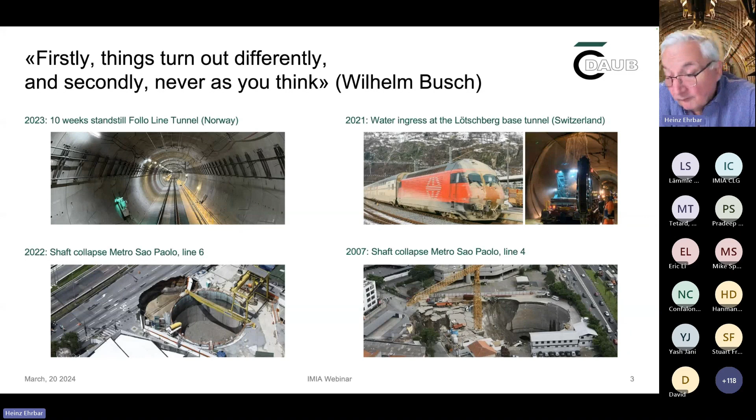So the German author Wilhelm Busch said once, firstly, things turn out differently, and secondly, never as you think. And as those pictures show from certain projects, Follo Line, Lötschberg Base Tunnel, and two pictures from the metro in Sao Paulo, this sentence is also valid for underground construction. If you take the picture of the Lötschberg Base Tunnel, nobody thought that we could have such a water inflow in a tunnel which was built with an impermeabilization, but finally we had such a water inflow, and the train was rather dirty, and for the people it was not a very good experience to drive through this waterfall. And the other things are similar, very often an influence of water. So I think that's very important.

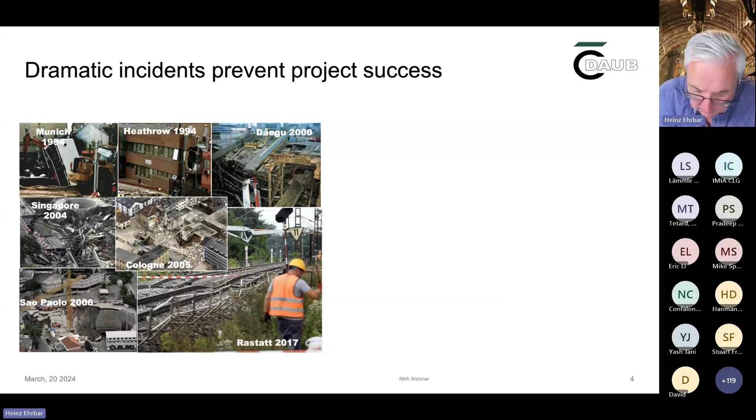As we mentioned already before, the incidents in underground construction have a rather long history. It started with the major tunnels 100 and more years ago. There were several big catastrophes also in Switzerland. But if you have a look back during the last 30 years, we have certain examples from Munich, very well known in the UK, Heathrow, but also in Asian countries, and also in Germany, Cologne and Rastatt were very big incidents. And the consequences in the most severe cases are the loss of lives, fatalities, and serious injuries. But very often we also have delays in the construction program, and this creates enormous financial losses. I think we are talking about tens of millions of euros or hundreds of millions of euros. So if you take the case of Cologne, this was nearly 19 years ago, and the line is still not constructed.

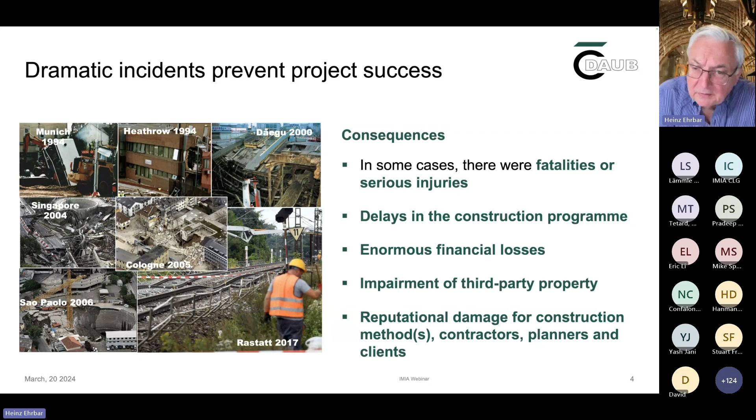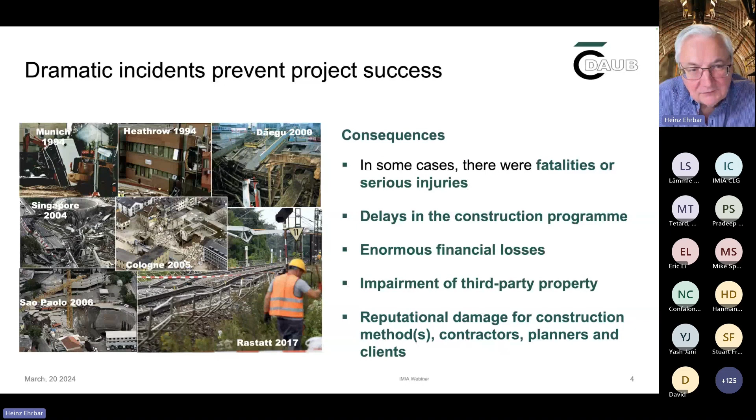Then impairment of third-party properties, and it can create reputational damage for construction methods, the contractors, the designers, and the clients. I remember very well that NATM was not a very good word during or after the Heathrow accident, or I was once in Taiwan where nobody wanted a TBM anymore because they had certain difficulties in a major road tunnel there.

Risk events do not simply occur. That's something you know, but I think one has to remember this chain of cause, risk event, and impact. So risks normally have a cause and the risk event, which has a certain uncertainty. But if we have an event, then it has an impact and it has consequences on the project objectives.

And risk management is nothing else than to help to avoid the threats and to use or utilize the opportunities. And this starts with recognizing the causes and eliminating them as soon as possible, and then to minimize the probability of occurrence in the case of a threat, and to minimize and to control the impact of a threat.

On the other hand, opportunities, we want to make use of them, and we want to promote the causes to maximize the probability and also to optimize the impact or to maximize it. These are some key issues.

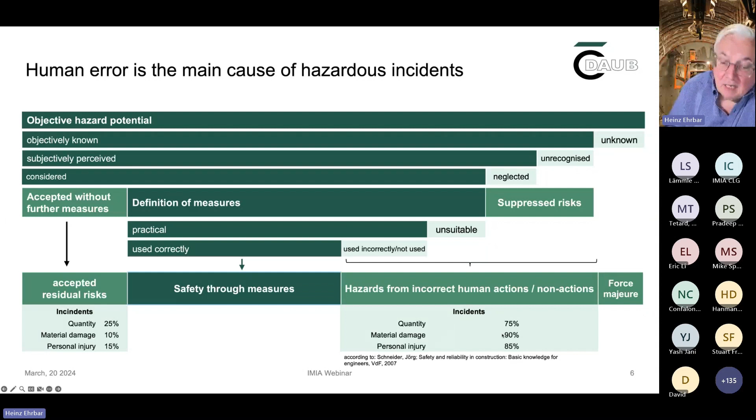But if you have a look at the material damage or the personal damages, injuries, then we see that these figures are even higher. And I was very happy to see that the figures correspond very well also to your studies. A little more than 10 years ago, Mr. Reiner published these figures, and we see that force majeure is in a similar range of 18%, and the rest, lack of communication, insufficient ground investigation, defective construction, design errors, is related to human behavior.

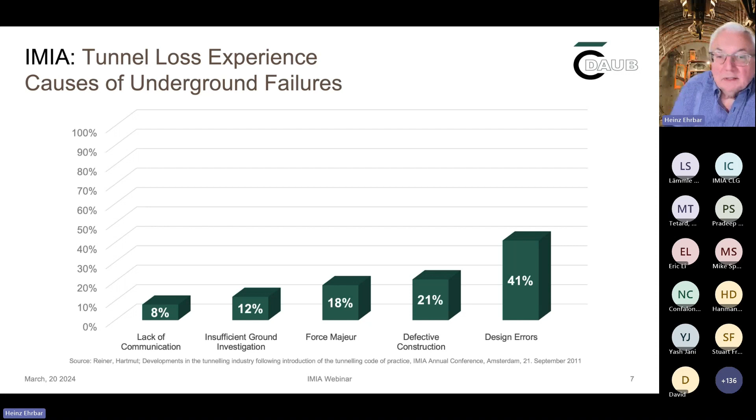And I insist a little bit on this because in underground construction, we always see the ground risks. They are very important, but it's also very important that we are aware of these mechanisms of human errors and that we fight the human errors together. This is, I think, very important.

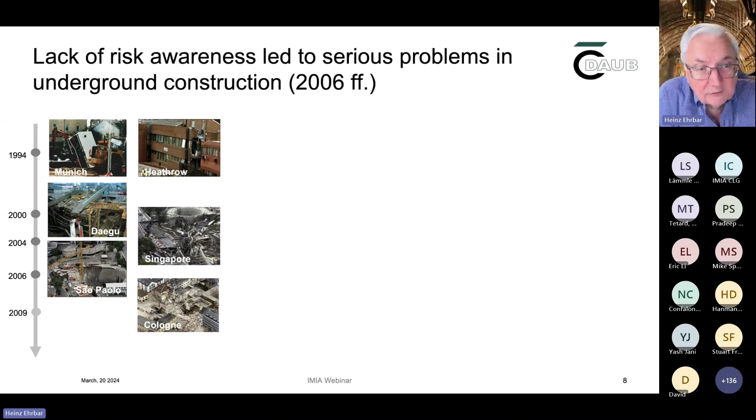As we were talking before with Mike, this is a long history, the cases you have seen already. But in 2006, the situation was like this, that I think the insurers said we are not able to insure underground construction anymore if there are not certain measures taken. And this was then the moment where one started with this code of practice, first from the British Tunnelling Society, then with IMIA and ITA. I think in 2006 it was only the insurers, and then 2012 with ITA.

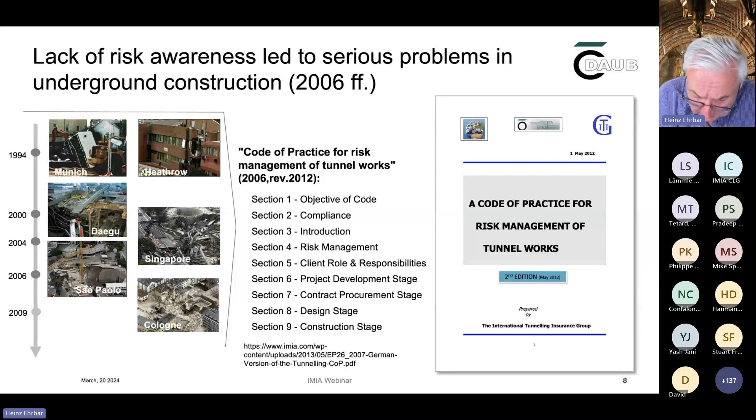And according to my experience, this is an excellent basic document. And as I mentioned to Mike, I was in the Swiss Tunnelling Society in the executive board, and we had members there which said, if we have to follow this paper, we can't construct tunnels anymore. They didn't understand the importance of the message in this code of practice. And I think if you only follow this code of practice, you can avoid a lot of problems. So I think there was a very important input.

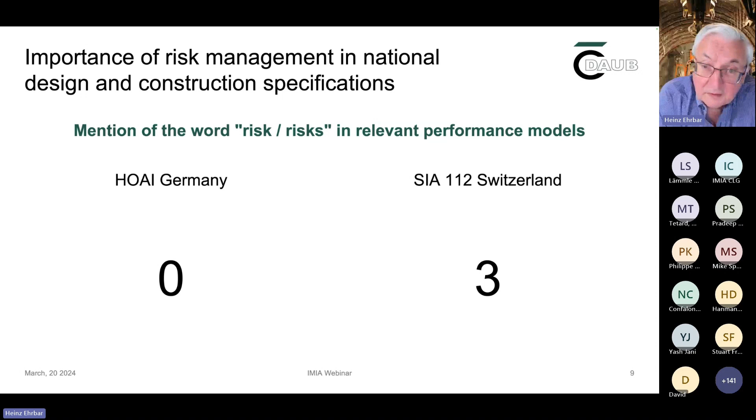But if you have a look on the national specifications on design and construction of engineering or architectural works, we have in Germany this famous HOAI. This is a specification for the services of engineers and architects, or in Switzerland we have the code SIA 112. And if you take a PDF document and you start searching for risk or risks, in Germany you have 0, and in Switzerland you find the word risk 3 times. And I think this is completely insufficient. And this was the motivation for us in the DAUB, that we said we have to start once more with this topic and to promote it, that a very important task of engineering work is risk management.

What is very important also is the hierarchy of the risk management, because after the bankruptcy of major organizations, Enron, I remember, or Parmalat in Italy, in many countries there were introduced legal requirements on the level of the company risk management, and these requirements from the legal part, they must be fulfilled. On the level below, on the risk management in the project, we don't have these legal requirements. One can say, okay, to fulfill the company level, we have to do something on this level, but there is a lack of pressure, sometimes also of documents, how to do this on the operational level.

And finally, if we are going to the construction phase, I think there we have a lot of excellent documents on the processes, how to construct. I think there we have a good basic work, but here we thought we have a lack, we don't have sufficient ground, and we have to do something from the DAUB. And therefore we said we will produce something for the German-speaking market, not because the ITA paper is not good, but it was not very well known in the German-speaking countries. And we said we want to do something which can be included also in our contracts, or that we work like this. And we got also big support, I have to say, from the insurers, especially also from Munich Re, which helped us and supported us very much in this work.

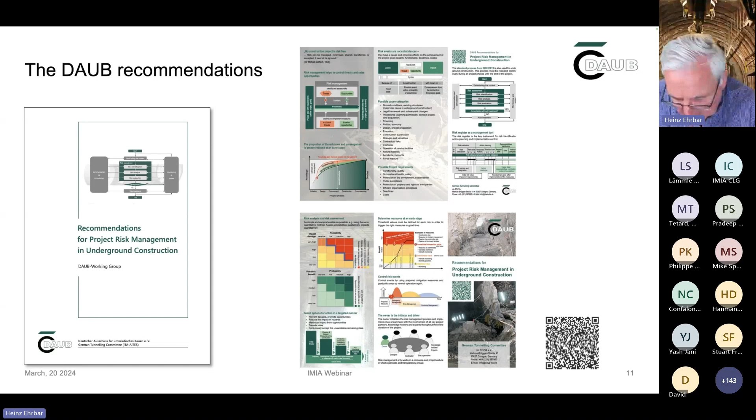When we presented this work at ITA, the people said 70 pages, it's too long, can't you make a shorter version? And we produced this flyer, which you can also download, with the most important topics. And I think if you only follow this flyer in the projects, you have already done quite a good job. And this was our motivation.

So the objectives and the target audience: the recommendations are intended for everyone involved in the project, not only owners, but owners, designers, contractors, third parties, also experts, whoever, and for all phases in the process of a project development. And what we wanted to show is the imperative need for the phase-specific project risk management. I think during the entire cycle of a project, we have to implement the risk management. Then we wanted also to clarify the role, specific duties and responsibilities of the owner, designer, contractor, and introduce common and easy-to-use methods and tools for the project risk management. Because the focus must be on our site, and it shouldn't be too complicated for the management of the site.

So the scope of the recommendations: it is principally usable or applicable for all construction works, not only underground construction, during all project phases, from the basic design until commissioning, and for all trades of civil works. If you go to the industrial processes, mechanical or electronics, there it might be different, but for civil work it works. And it should also work for all contract models in construction. In general, maybe one has to change a few things, but it is generally applicable for all contract models.

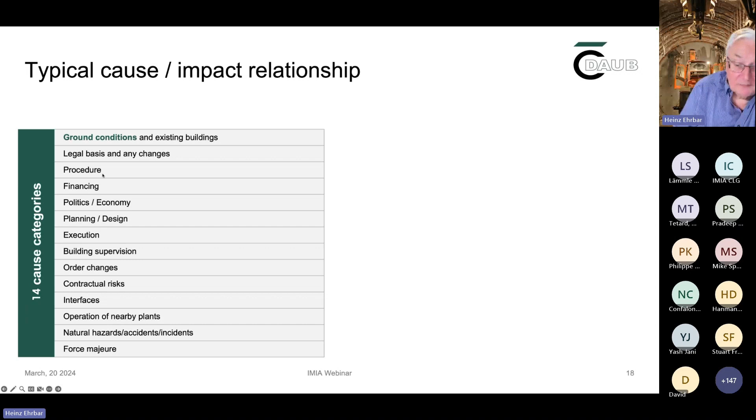Very often one is discussing the causes, and you can find in the literature quite a lot of catalogs of cause categories. We made a compromise of this literature and defined, also based on the German experience, these 14 cause categories. And as you see, we have the ground conditions here, and we have force majeure and natural hazards, but the rest is all related more or less to the behavior of the project team. And this can have an influence on the project requirements also.

Very often one is talking about only cost, time and quality, and we created a catalog of 11 important project requirements for underground infrastructure projects.

Then the process starts with the risk identification, and this is very well known. We have a lot of different tools, from workshops up to interviews, literature study. What is my personal experience, and I'm a little bit frustrated about this, at least in the German-speaking countries: at the Gotthard base tunnel, we had risk registers in the most complicated cases with about 400 risks in the risk register. And when the tunnel was completed, this went to some archives, and nobody was interested in these risk registers where you have a tremendous knowledge base. And I think one should evaluate existing risk registers, or have a place where I can find such registers, and then everything becomes a little bit easier.

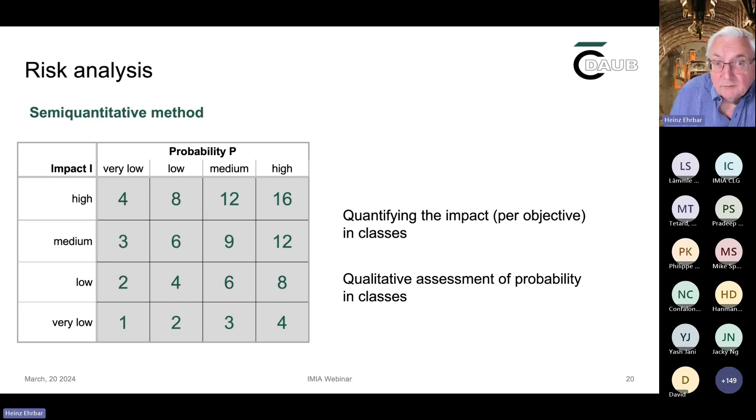The analysis, there are big discussions, but we said we make the focus on the semi-quantitative method, where we are quantifying the impact. Normally you can quantify the loss of money, or what is the impact on the construction schedule. This you can quantify. But what we think in many cases, we don't have a database to quantify the probability of the occurrence or the likelihood of an incident. And there we think it's more honest to make it in classes, where you say it's very low probability, low, medium, or high, according to the experience, and not making figures with 3 figures behind the comma for the probability. This shows an accuracy which has not a scientific base, we believe.

And then we have to make the assessment which risks are accepted, which are not accepted. We have to produce the acceptance line. This can be different from this example, and it's also not said that it has to be a 4-to-4 matrix. We worked at the Gotthard only with 3-to-3, and it worked very well. I think each organization has to make the decision which is the best system, but we think the semi-quantitative method is very good for the site management also. I think it's not too complicated.

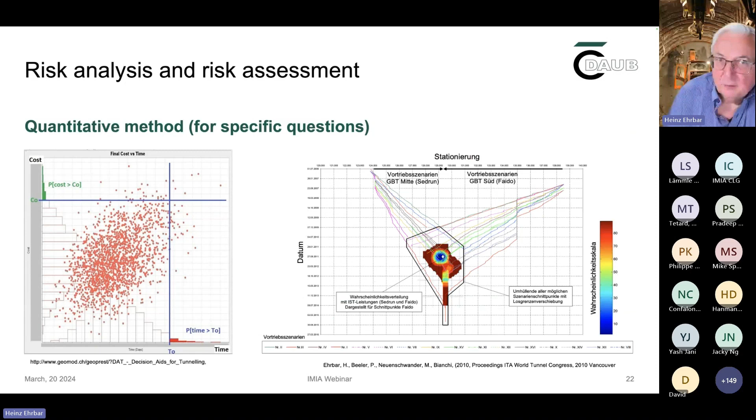And finally, we are not against quantitative methods, also with Monte Carlo simulations and such things, but we think this method should be used for specific questions, where it makes sense, as it shows here the estimation. I think the example is of the Lyon-Turin tunnel, the TELT probable cost and time scenarios, or we made such a study also for the final breakthrough at the Gotthard base tunnel. I think for such specific questions, it makes sense.

How to implement the whole thing. The risk register is the most important tool, I think. This is the key management tool. It's rather easy, but I was surprised you don't find the word risk register in the ISO 31000. So we made an example, and as I showed, in the daily business it will be a little bit more complicated, and it's very helpful if you use the IT tools. There are excellent databases on the market.

The options for action are also very well known. I think one has to avoid by the design and the planning process, to reduce with protective measures and emergency organizations, and you can transfer risk by contractual agreements or insurance solutions. And as it was mentioned before, we have also a stock of accepted residual risks, and with this we have to manage our projects.

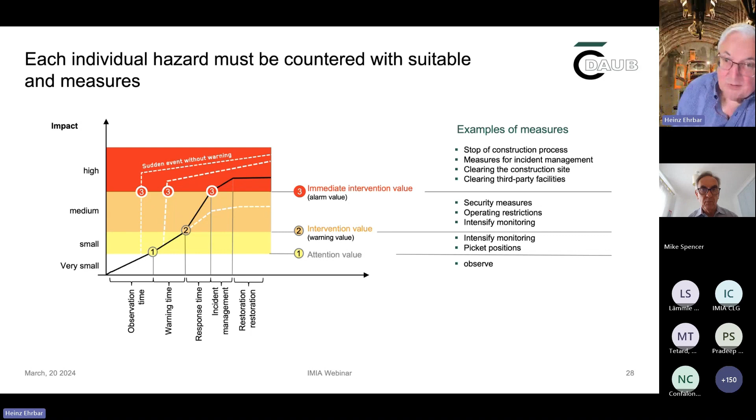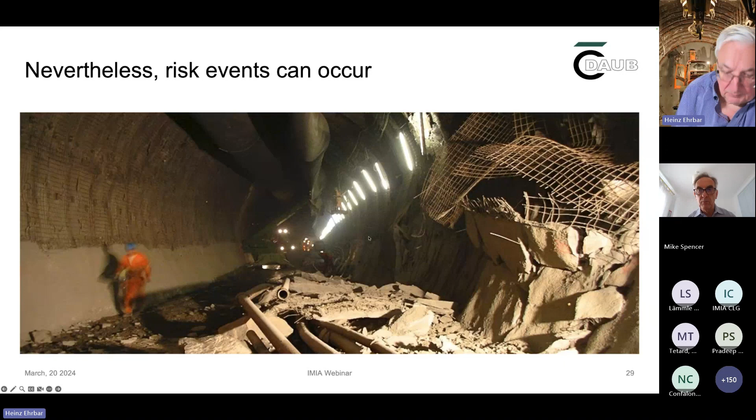Maybe it sounds easy, but I know projects where there is a lot of monitoring and it's not quite clear who has to interpret the results and who is responsible for taking the measures, and this is part of the risk management, that everything is clear. But nevertheless, we know that risks can occur. This is a rock burst event in the Gotthard base tunnel. Such things can occur, and then if you have the incident, you need emergency management.

Later on, in the first hours or days after the incident, we still have a crisis on the site, and you need crisis management, very often with additional knowledge or additional support, until you can go to continuity management. And in such cases, especially severe or heavy incidents, it's very important that you have clear communication. I have followed certain cases of such incidents, and I think it's very important that you have a clear strategy of communication.

The one voice principle: I think the worst thing is if 3 or 4 people talk within 3 days about the incident with slightly different opinions. This is very bad toward the authorities, but also toward the public, and this must be under control. At the Gotthard base tunnel we followed this process. The responsible was the communication officer with the CEO and the executive management, and they decided whether we needed an additional task force for the crisis management. For certain cases we had standby task forces, and we used them. I think this is a very good principle.

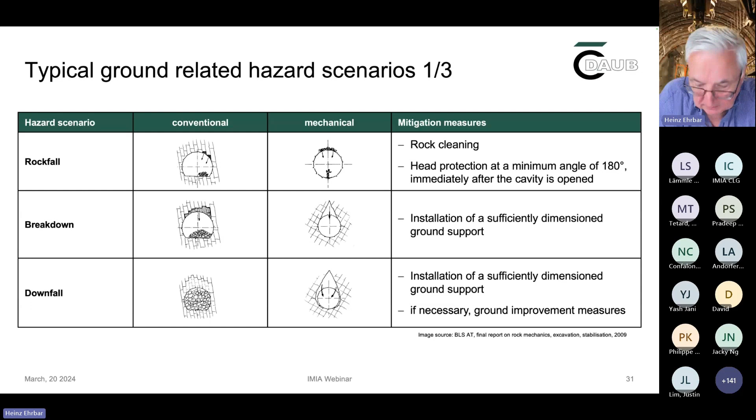Yes. Okay. So right. Here I wanted to show that we have hazard scenarios. This is typical for underground construction. And very important is the responsibilities. What is quite clear, the client is the first to come into contact with the project, and he must initiate the process. And this is very important, that the client or the owner takes this role, and he includes all the internal participants and the external participants. And they must be integrated. I think that's very important.

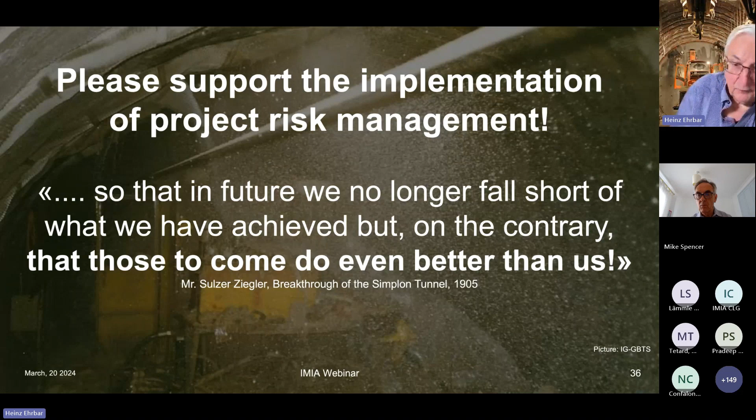So I'm at the end of my presentation, and please support the implementation of project risk management, so that in the future we no longer fall short of what we have achieved, but on the contrary, that those to come do even better than us. This is a sentence from the breakthrough of the Simplon tunnel. This was the longest railway tunnel of the world, and this sentence was mentioned by a member of the board of directors of this organization, and I think it's still valid today. So thank you very much for your attention.

Thank you, Heinz. I'll start with one question I thought very relevant to what you've just said in red: how will the recommendations stop clients thinking that they're saving money by not releasing their risk analysis to the contractors during the procurement period? They feel that if they don't release the risk analysis, the contractors might think it's an easier job than it really is and give cheaper prices. How do you stop that?

I think it's a topic of the culture. How do we work together? If a client thinks that by not mentioning his own risks he has an advantage, then the contractor during the tender phase says, "Oh, I've seen certain risks. I will also not mention them." Then we have this famous situation. I think this is really a change of the culture, how we are working together. In the German-speaking countries, I think it's a difficult process. We start now with new contract models, more based on alliances. Maybe this helps, with open books, and we work together.